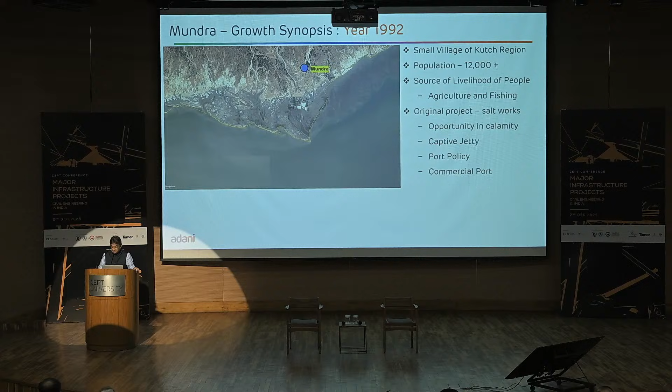That's where the story began. If you look at it now, the same asset, the same location, looks like this—something having already 26 berths from nothing. If you look at these numbers, I'll keep talking about it. What it means is that it has given the opportunity for a sleepy town to become an urbanized place, whereby, to my surprise, there is a traffic jam in a place called Jarpara, part of Mundra.

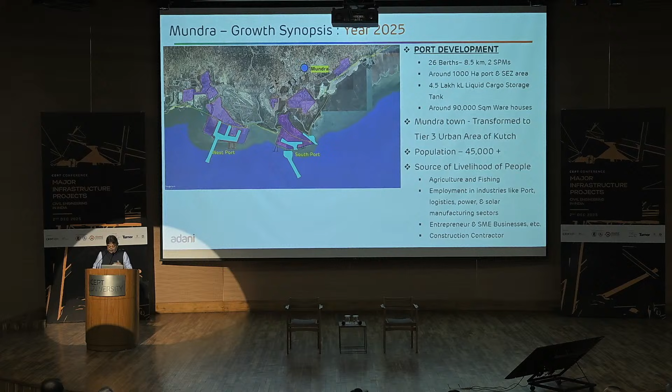And that's something very good to see, where you see the overall development, in just the journey of the last 20 years, becoming India's number 1 port, surpassing old ports like Kandla which have been there for years together. How is this going to look when we see 2050? Starting from nowhere, we are going to build 153 jetties in one single location.

What does it mean? It means that it will eventually handle, in spite of Indian growth that we are talking about, 30% cargo of all India. And it only shows the power of imagination, power of grit, power of continuity.

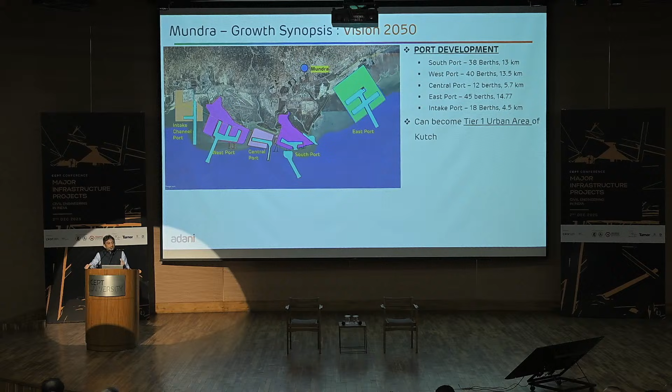Once you decide, all the natural forces as well as the infrastructure forces, be it government or private, will start actually getting accumulated. That is what has happened in Mundra. When we started, there was no rail connectivity, there was no road connectivity, there was no water, there was no power. And all of us can imagine being in Gujarat, a Kutch zone which was the most backward zone.

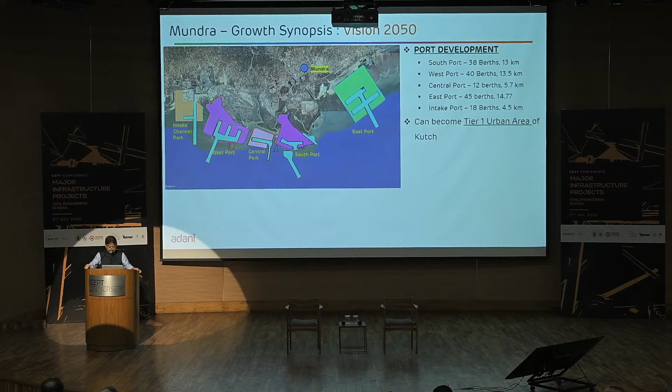The most important thing for the port sector is the connectivity, because the capacity of port is dependent on the cargo that you are receiving and the cargo that you are able to evacuate. And the evacuation for the port absolutely depends on the railway, even more than road.

So when we went there, there was no railway line. The most important thing was to build that to the national network. The nearest railway line was in Adipur, near Gandhidham, which was almost 70 kilometers away.

Now imagine, as a private sector player, to build a railway line on our own, starting from acquiring the land, thousands of survey numbers of the private and the government that we had to acquire. With the acquisition, build those bridges in between, take hundreds of clearances from government and other local authorities, deal with the local agencies, local people, local NGOs, local mafias, if I may use it. This is what one had to go through.

And then to do this construction, completing in less than 2 years, to connect to the port, because if that was not there, commercially we would have been dead.

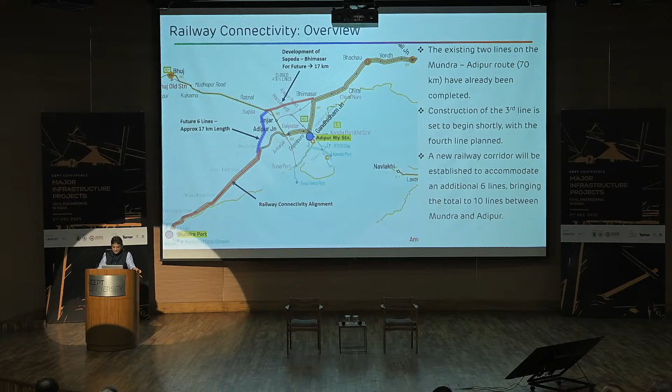Some of the important milestones, just want to share. Why am I showing this? We actually created 3 different phases. The reason of listing out is that not only are these the requirements, but the important thing is that one has to do it simultaneously.

While we start the journey of doing it, first the multipurpose jetty, because at that time you don't know, you are absolutely not sure of what cargo is going to come. You start with flexibility in design, which is a multipurpose terminal. Because today, when you see a fully developed port, you would say the most efficient would be a very specialized cargo terminal, which is for a particular cargo, or container, or liquid.

But when you begin, again, it's something that I'm wanting to convey. Flexibility brings inefficiency, but flexibility gives you hope to survive. And this is something very critical, again, in infrastructure, whereby if you try to create a very specialized facility, but not having sufficient cargo or customers, there are chances that probably it will die early.

The important thing is, when you plan and when you design to begin with, when you're not sure, build flexibility as part of planning. The multipurpose terminal that we started had capacity to do bulk, container, everything.

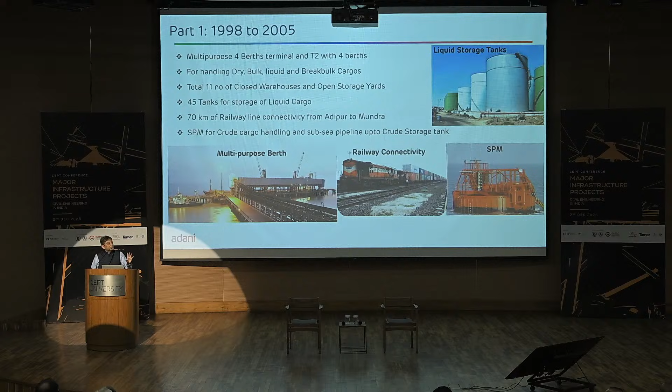So overall, the port in the first phase had the capability of handling all bulk cargoes, all types of project cargoes, and all types of container cargoes in one single location. These are a few pictures showing how, as we grew, we kept on expanding not only our multipurpose terminals, but also on the container side and the liquid side - be it on the marine side or the land side, the warehousing for liquid or bulk, or the entire port backup facility for containers.

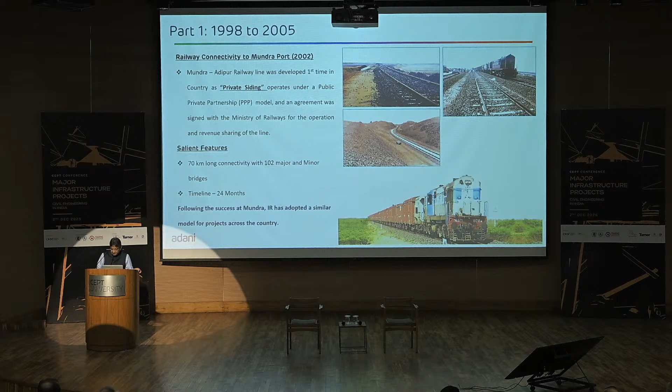Some of the learnings that I want to share - when we built the first multipurpose terminal, originally it was supposed to be hollow precast piles. In the marine environment, after doing extensive investigations of soil, a company like L&T and we decided on a particular construction methodology - concrete hollow pre-stressed piles.

When we started driving those piles, at some locations we realized the soil was very stiff and we were not able to really drive the piles. The entire engineering had to be redone. We had to change from concrete piles to steel piles in the middle of the project. L&T had to change the entire construction methodology. We lost out on 6 to 8 months. We brought in a separate, very specialized barge to drive the steel piles in the middle of the sea.

Large infrastructure projects will face a lot of difficulties. It's again about perseverance - finding the solutions, looking at the conditions at that point in time, changing your way of looking at things, rather than blaming the stakeholders at that point of time. Find the solution, go ahead with it. We lost out on 6 to 8 months, finally changed it to steel piles, and finished the project in 1998.

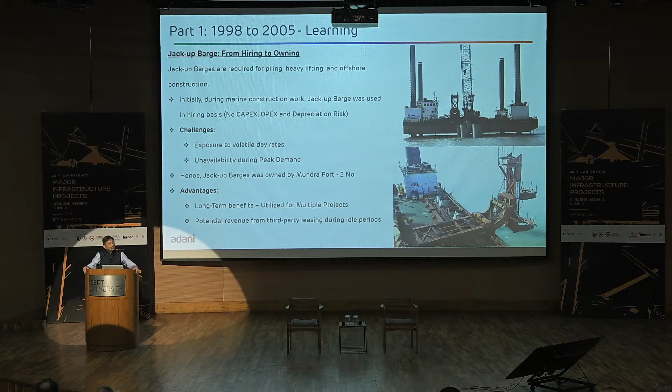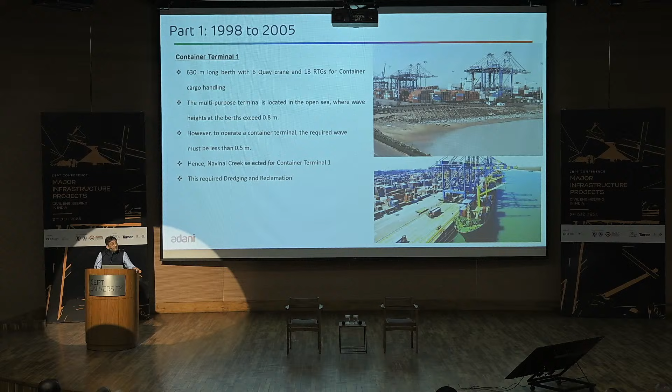As I'll quickly show you, the same thing happened in dredging as well. The journey continued right up to 2005, we kept on building. Some examples I want to show you: we did dredging in Mundra. By volume, it is 300 million cubic meters.

If you look at Palm Jumeirah, all of us know about it. That picture you see has 94 million cubic meters, and Mundra has done 300 plus million cubic meters as on date. Nobody knows about it. This is an Indian, local company with its own dredgers.

Until we started this journey, it was all foreign companies, typically European companies, who had the monopoly in dredging. They would charge 10x of what the actual cost would be. When we realized this, we said, why can't we have our own? People laughed at us, saying you're talking about being a dredging company, you're doing dredging yourself? Do you understand, it's a monopoly. We bought one cutter suction dredger.

We continued our journey. Today we have more than 20 capital dredgers. We have the highest capacity to dredge in this country, including government companies. That's why all the projects we build, we do ourselves at probably one-third the cost and at the fastest speed, because we control the entire activity. Ports cannot exist without dredging and reclamation. What is the message? The essential ingredient required for large infrastructure must be controlled by the developer and contractor themselves rather than depending on outsiders.

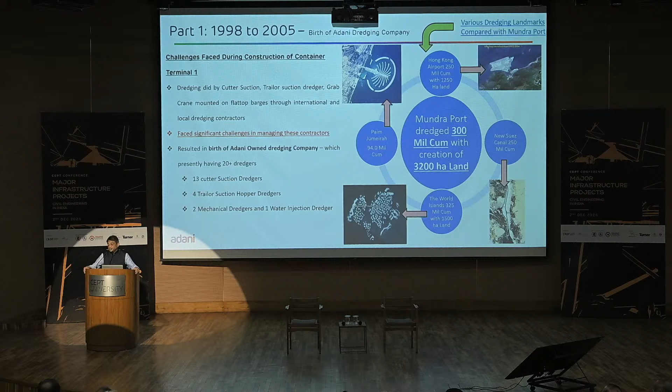This is SPM. No private sector company till date had done SPM on their own. It requires submarine pipelines. You have a floating equipment, as you see, which is 4.5 kilometers away. You have to make sure not even a drop of oil comes out of it, or you've finished the project because environmentally nobody will allow you. So executing those projects was not easy.

To save money, there is one more thing I want to share. We went to the extent of buying steel, bending them, putting concrete pipelines separately, bringing the laying barges from outside, and putting cathodic protection to make sure corrosion does not happen, all separately. While people would do it as one single EPC contract, I had at that point 25 different subcontractors being managed by ourselves, and at that point of time we saved 100 crore rupees.

The point is value for money. At that point of time, if you do not go into that mindset of saying every penny I save for my company is going to be put into creating infrastructure which is nothing but an asset for the nation—that is what has happened at every stage of life in Adani, whereby we keep engaging ourselves not only in new learning but investing in different aspects of project execution, controlling every parameter.

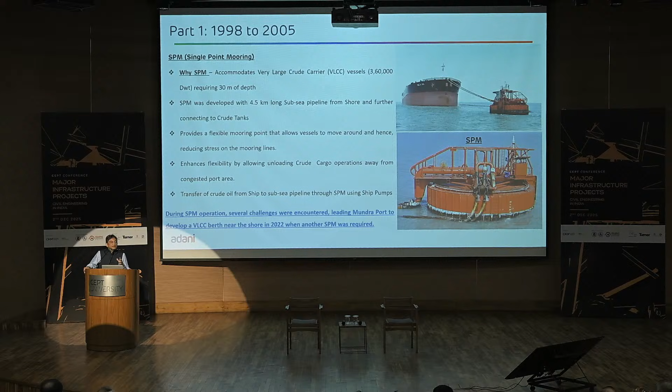When we did that SPM, we were very happy, only to realize later on why we did not build the jetty itself, whereby we would have no limitation in terms of handling. These are some learnings.

At one point in your life you feel you have done a great job, but when you see the context later on, the technology improves and your confidence improves. From SPM, now we have built VLCC handling jetties, where large vessels can directly come to the jetty. We don't need SPMs. These are not mistakes, I'd say, but kind of progressive learning that one has to keep in mind.

I'm very happy to share the kind of troubles we had or mistakes we made, because we surely want youngsters to believe in one simple thing: please do not stop.

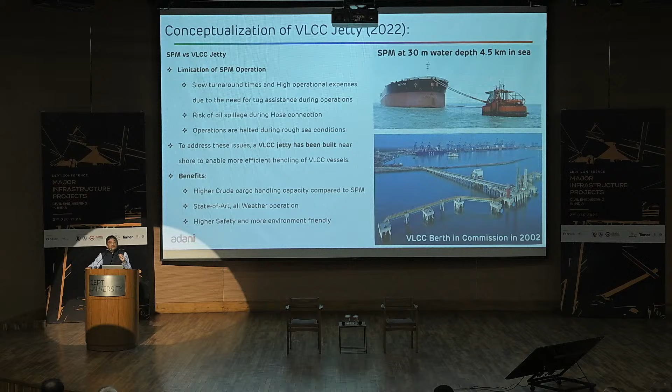Then the second phase of development, I don't want to get into the detail. Airstrip got developed, RoRo facility, all container coal terminals, second railway line. It went on and on. We never stopped, and we continued our journey.

The first airstrip that was created, obviously the financial guys were really after me, asking why do we need it. The only thing I said was, if you put the airstrip, and if Gautam Bhai starts coming faster, because otherwise he has to travel 6-7 hours and would come probably once in 3 months. But even if he starts coming once a month, the project is going to be delivered a year early. Your entire financing concern about the airstrip is gone.

So facilitating stakeholders to really come in, be it consultants or contractors, things became so easy. And that's very important for infra projects, because they are at different levels of site difficulty.

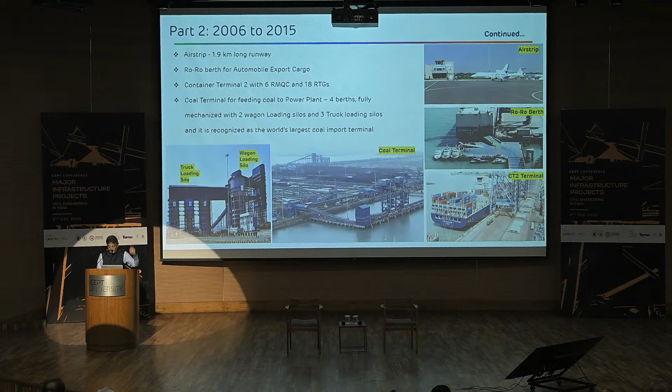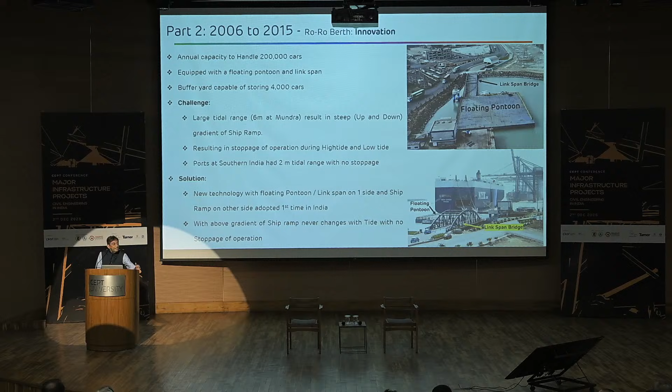This went on. These are some of the pictures you can see. Very large development happened, including the RoRo terminal. I don't know how many of you are aware, but Mundra is the largest exporter of cars. Today, Maruti and other automobile companies export their cars from Mundra.

This is one interesting example I want to share. When we started developing the Westport, we started the way we had earlier, with one multi-purpose jetty. Just to realize - and I have Vinay Singhal who's sitting here, who was part of the team - he probably thought about it: why are we doing a jetty? Why can't we create an entire basin? Rather than one jetty, two jetties, three jetties, we came up with the concept of the basin.

Because by then we had realized that we had beautiful material available in terms of quality of sand to reclaim. And if we do that, we were actually manufacturing land as port backup area, and along with that we were creating berths. These were the learnings.

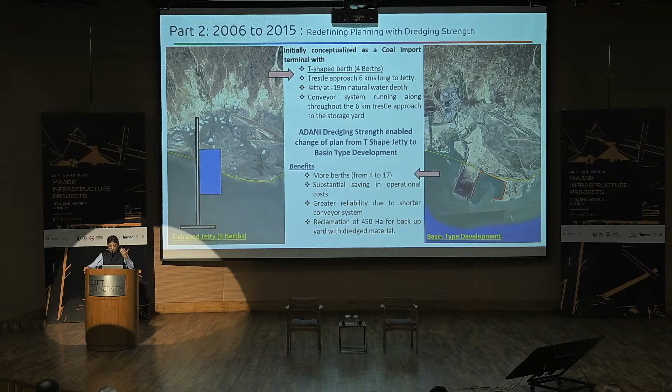Obviously, as I said, the first terminal we built at that time, we did not have the capacity and we did not have the surety of cargo. But by the time this phase started, we knew, as what Satyaki was saying, that in India, you build and it is going to be consumed. We realized at that point that if we build infrastructure, cargo will follow. That confidence was fantastic, as we saw. And then we created the entire basin through our own development.

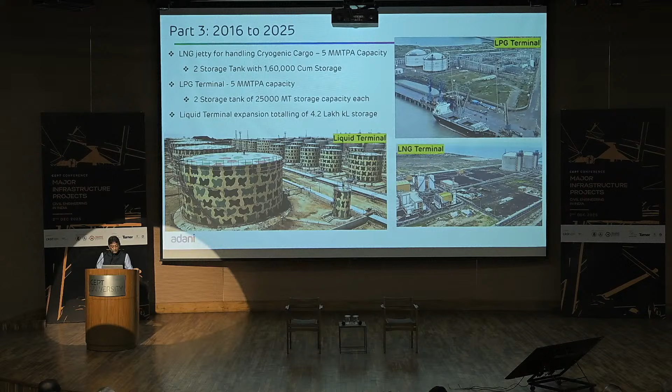Then, of course, there was no stopping. I just don't want to bore you, I just want to show you some pictures of how it really grew, including large liquid terminal, LPG, cryogenic tank terminal. There's some unbelievable stuff. And then you see these pipe conveyors connecting to the manufacturing site.

So every type of development happened in Mundra. Once the infra seed is put, it automatically becomes the catalyst for everything else. Not only infra, but now Mundra has become the hub for manufacturing.

Obviously, one has to move on. We have to transform ourselves from the traditional port way of working. Now Mundra is on its own way to becoming a fully automated terminal. Earlier, you saw hundreds of people working in the port. Now when you go to Mundra, you will see the entire container terminal operated without a single man. That's the transformation in a nutshell that I'm saying is going to happen.

And as we were mentioning, when you look at China, it's just amazing. I totally agree that there is no comparison, but let's strive for that. And that's exactly the journey Mundra is on right now.

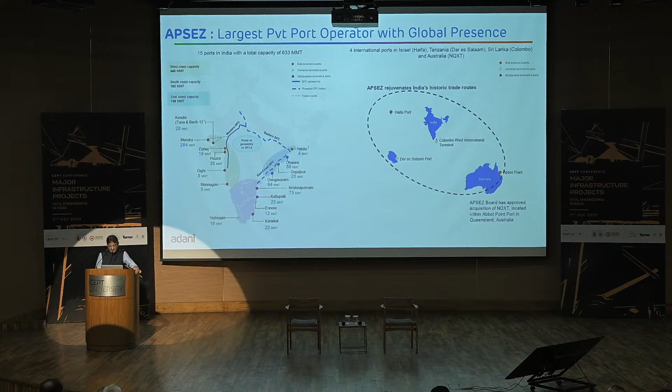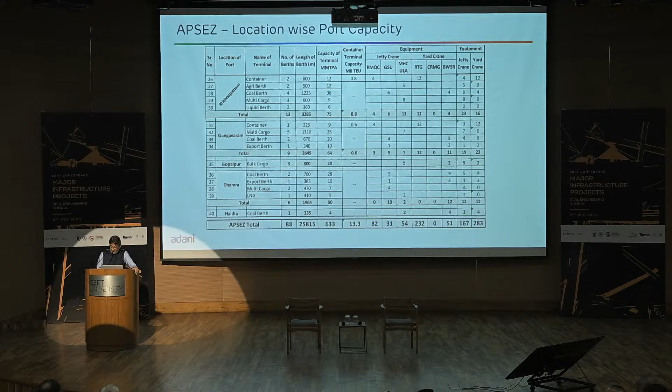If you see the overall infrastructure, these numbers are staggering. Just consider this: total capacity of the terminal is 633 million tons, which is unique. But if you compare with China, China's largest port would be handling between 800 to 1,000 million tons. And I think they have several of them, but today India hasn't even got one.

That's what we are striving for, long way to go. Quickly to sum up, while we do what we do, I would request especially the youngsters, that like every entrepreneur you see today with large success stories, it's very important to have your fundamentals very clear. Some of the commandments that we should create, and what we saw in our life, in Mundra's life, in Adani's life, starting with vision, but the important thing is hunger.

Hunger for execution. The country requires execution, implementation, and that hunger is most critical. People development, we don't focus on. However many people you have with you, working with you in your team as subordinates, focus on their training, on their development. Systems, processes, technology, the key for scaling up.

Transparency in decision making. First, make decisions. You'll make mistakes, but make decisions. With transparency, people see you as a leader who's objective, open and authentic. Meeting people halfway. We have a bigger issue in terms of egos. If this is something very simple we learn, you come halfway, I come halfway, and solutions are always there. There's nothing that can't be solved.

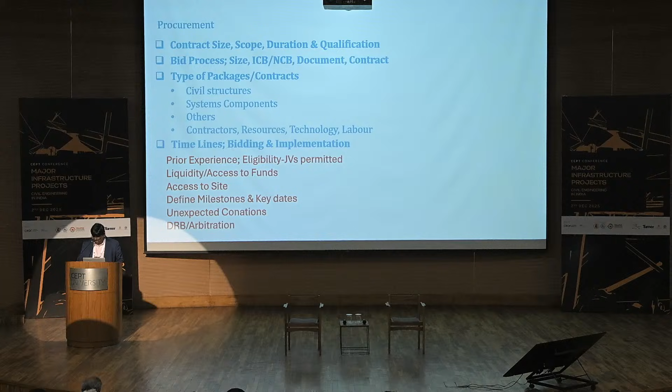Similarly, the dispute resolution board and arbitration related conditions, which got well defined under the contract in 2012-13, also took two months. We had to do a lot of iterations, make them understand, accept certain things, and they accept others. So we could arrive at a middle ground, and these conditions were accepted by the bidders also. And finally, we have the contractors.

You can see these are the so many contracts that we have awarded, almost about 41 contracts. These contracts span from 7 years to 12 years. So the contract conditions have to remain relevant throughout the contract period, irrespective of change of market situations or change of people leading the project.

There are some penalties levied based on that, but some have been refunded, because once you fail on one milestone, you are put a penalty. If you meet the successive milestone on time, then you are refunded. So this kind of provision is there. We have done that part of it, and we achieved that.

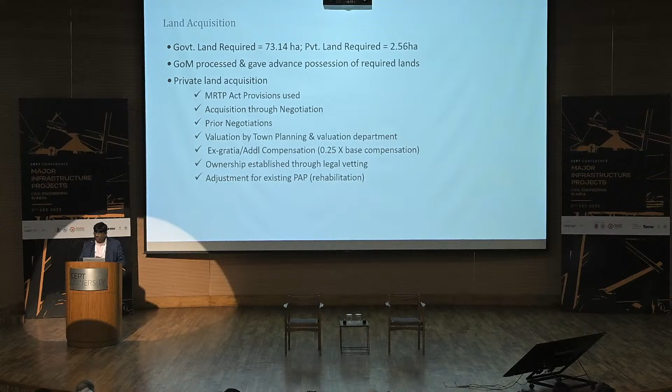As I said, 73 hectares of government land and 2.56 hectares of private land was acquired. We have used MRTP Act provisions, then followed various steps. The ex gratia compensation was quite attractive. Apart from that, Government of Maharashtra has given a 0.25 factor above if the land acquisition is accepted under negotiation process and fast tracking it. So that has made it 2.5 times the market value - very, very attractive for the landowners, and then we could acquire all the lands.

So land R&R policy was already existing, well tested, so there was not much problem about 2,125 slum PAPs. But the in situ rehabilitation has really taken a long, long time. We are still constructing these buildings - these are the 3 buildings.

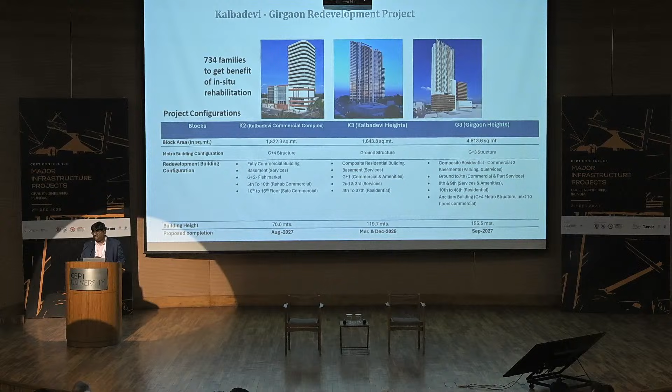One will be a 16-storied, another will be a 37-storied building, and the tallest will be G plus 48-storied building. This would be the tallest rehabilitation building built by any government entity anywhere in India. Again, all the 3 buildings are integrated with underground metro stations - this is another complexity. The reason for delay is because till the metro works are completed, we could not start most of these building works.

So these are done. Apart from that, the implementation challenges - so this is land acquisition. Implementation challenges as usual, the environmental tree cutting, then the removal and transplantation and compensatory plantation. There are survival related challenges.

So we deployed various combinations of these methods. We have done tree plantation in forest area, some microforest Miyawaki method tree plantation, and other private lands. We have gone to citizens to accept trees and give a commitment to maintain them with financial support from us. So we are able to do that.

Another challenge is that we have near about 25 court cases we fought. 5 of them gave stay orders, but the rest we could sail through. All the court cases we won, including the Aarey tree case - the Supreme Court has given a judgment in favor of us. These were fought at NGT, High Court, and Supreme Court, so we could complete. Then the Heritage Zone - the alignment is passing through 3 World Heritage precincts, declared long time back, but we complied to all heritage requirements and completed the project.

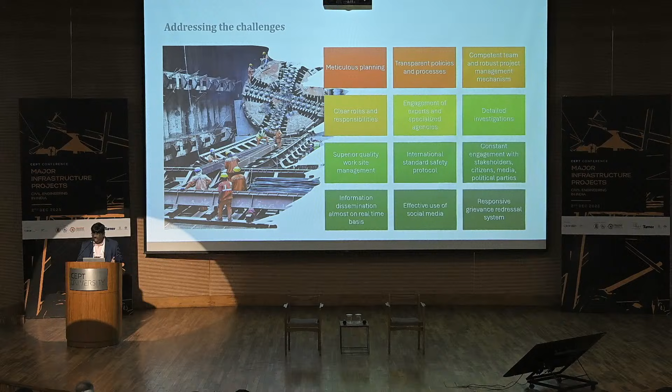That is one of the greatest things we achieved, and we are happy to mention that. We also got IGBC Platinum rating for almost all our stations, all our establishments. Of course there's a huge amount of steel, cement, concrete that went into it, but still we met these requirements and got the platinum rating for all the projects.

You can see the kind of temporary works that we had to do. Today you go there, the road is reinstated. You will never know that there was tunneling happening underneath.

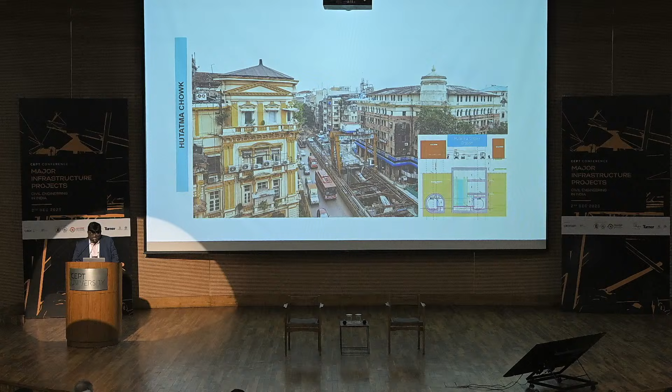Delhi had one Chawri Bazar station built using the New Austrian Tunneling Method. Mumbai Metro Line 3 has 7 such stations built over a period of 7 to 8 years.

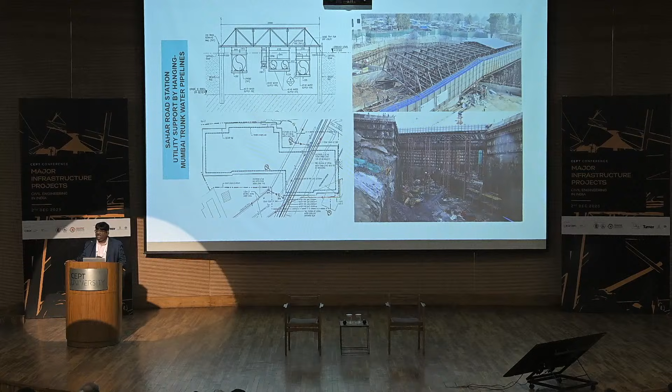These are some of the water mains we supported, as large as 3-meter water mains, which supply like a lifeline to Mumbai. These were supported close to Charu's premises, Sahar Road Station - he is witness to that. When we did that, we had to do an elaborate support system so the pipeline would not suffer any kind of damage. These are cast iron pipelines, nearly 100 years old. They were protected and the work was done underneath them.

We also had brick-lined arch drain sewer lines below Mumbai Central and below Girgaon station. Those were restored through reconstruction method. You can see the pipelines being supported. These are the pipelines below, I think, Worli station.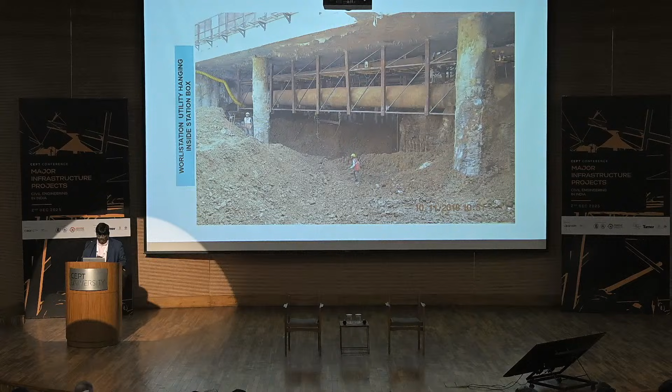Mithi River crossing. The other challenges we faced are ascertaining barrier-free access. Disabled access is one of the biggest things. We are all proud that more than 50% of our population is under the age of 30. But what will happen 20 years from now? We are all going to be 50 plus years, and all of us will also have to take public transport. So barrier-free access and disability access is one of the major things.

We tried to do our best. Of course, there is a lot of work in progress, a lot of things we still have to amend. Then, of course, multimodal integration - work in progress, testing, commissioning. Another thing I would like to mention is this - metro is not like a flyover or a bridge that you build and people just ride on that road. The operating system has to be set up.

For the first time in India, we awarded an operating contract through international competitive bidding. Of course, DMRC won the tender. It is a cost-plus hybrid tender, so the entire cost incurred will be paid, with spares and supplies provided by MMRC as per requirement. So this is another thing we did.

Then, of course, we went through COVID. We have been tested through social media and are still being tested today. Then activism is one thing we have faced.

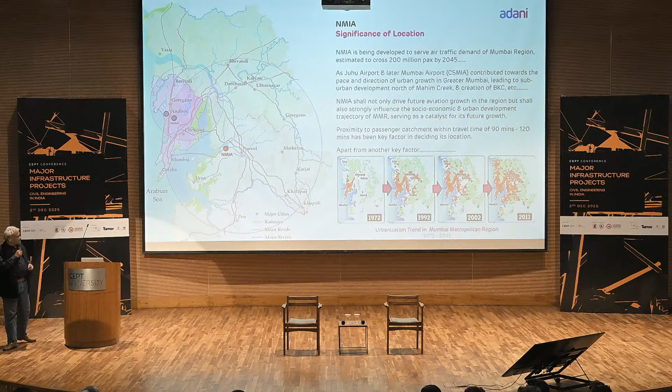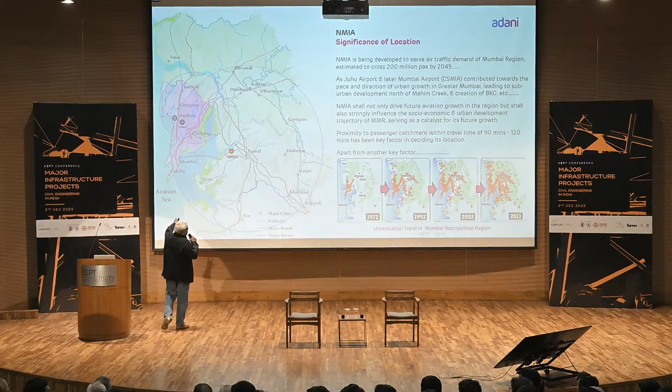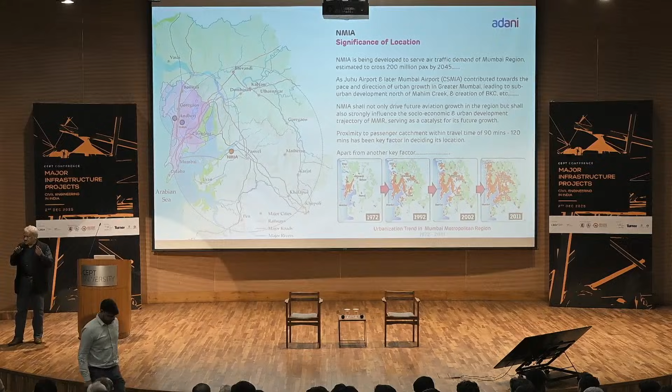This is regarding the location of this airport. I'm showing this slide because most of you are not from Mumbai and may not be familiar with where this airport is located. It's in the center of the Mumbai metropolitan region, which is roughly 6,200 square kilometers. Mumbai already has two airports: Juhu, used only for limited rotary wing operations, and Mumbai Airport in the heart of Greater Mumbai. But the rest of the metropolitan region, covering almost 6,000 additional square kilometers, is not served or in proximity to Mumbai Airport or its major passenger catchment. Based on demand for the coming years, the second airport for Mumbai has been planned.

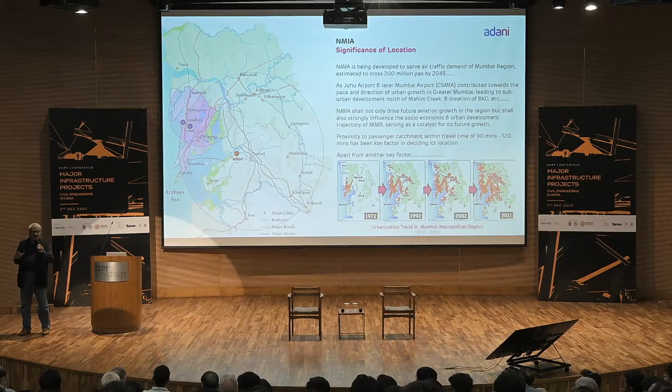This will be the second multi-airport system in this country, the first being in Goa, which has two airports, Mopa and Dabolim. This would be the second, and in Delhi we'll have the third one. The aerial distance between the two Mumbai airports is only 22 kilometers, which is actually a big challenge both for airspace management and airport planning. Its location is such that, being geographically central, travel time to an airport for domestic flights, based on global experience, should never be more than 45 to 90 minutes. For an international flight, it could be between 90 to 120 minutes.

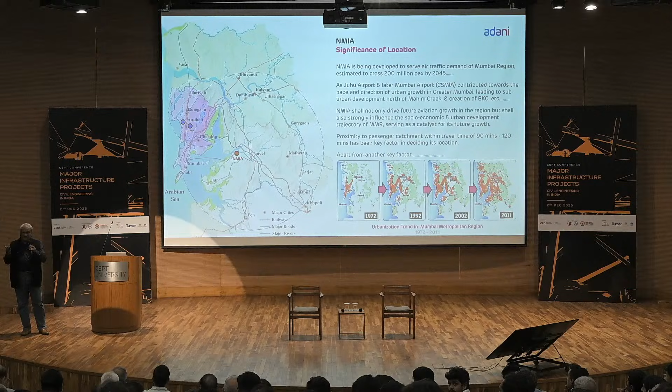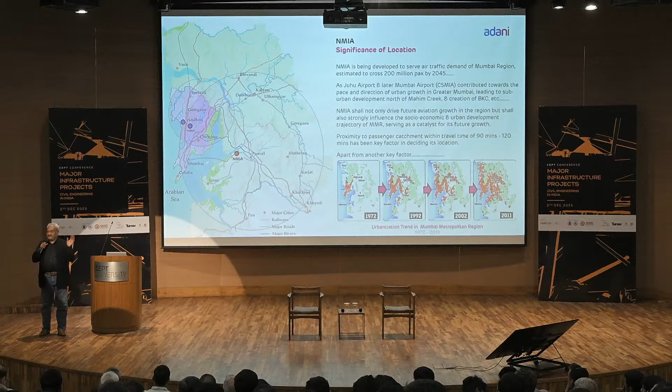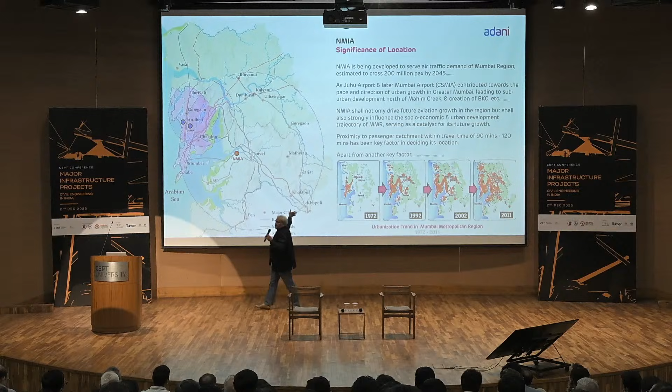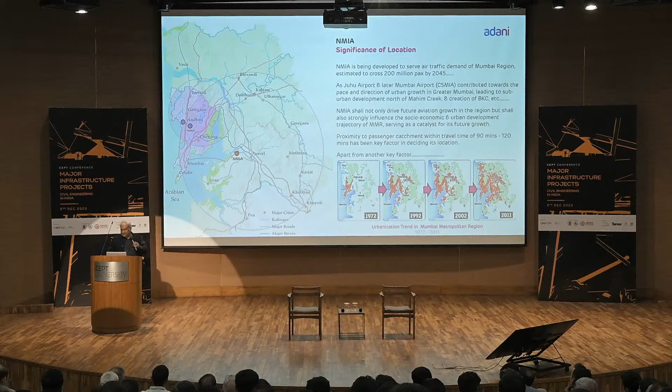Less than that is much better, but most of the time it's unachievable for reasons I'll explain. But anything more becomes tedious for passengers, who are often carrying luggage with family and friends. Therefore, this location is very vital. It was selected by AAI and CIDCO after vetting almost 14 other sites. At the macro level, the location was chosen because proximity from various catchment areas was almost equidistant by different modes of travel. The urban growth of Mumbai in past decades has been moving north and east, so this airport will be an economic driver propelling urbanization into the hinterlands of the Mumbai metropolitan region, eventually connecting it with the Pune metropolitan region, which is only about 140 kilometers from our airport. That distance is very important.

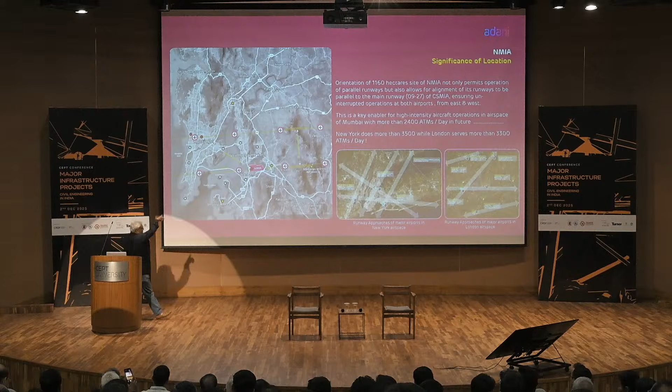The other reason for its siting is very vital. For any second airport, it's necessary that operations of the first airport are not compromised. The site was selected such that, in both shape and orientation, the approach path aircraft take to land on Mumbai airport's main runway 09/27 is retained, by having almost parallel runways at the new airport. So aircraft approaching all three runways, one at Mumbai airport and two at Navi Mumbai airport, can come in and fly out without conflicts between them. Otherwise, the overall capacity of the airport system would come down. The distance between the two airports is even lesser, only 14 kilometers, so planning the airspace has been a challenge.

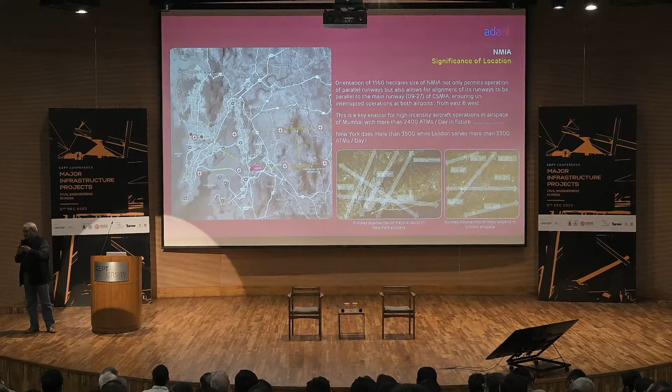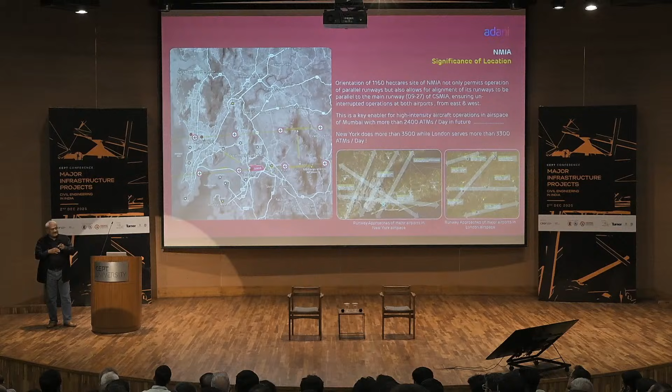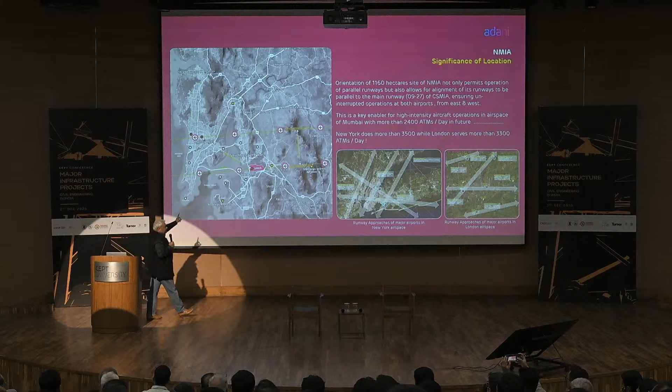It took AAI almost 4 years to arrive at the procedures aircraft have to take to land at each airport, because Navi Mumbai airport is surrounded by several hills, the biggest being Matheran Hill, due east in the approach path. When the aircraft lands, coming down at a 3-degree angle, pilots won't be able to visually see the runway, which is a precondition for them to decide to land or go for a missed approach. Therefore, for the first time in India, based on our insistence, 3 radars have been placed for this airport, 2 of them outside the airport. One sits on top of Matheran Hill, one is on an island in the Panvel Creek, and the third is inside the airport. So there are 3 eyes guiding the aircraft in, all done to enhance the capacity of this airport. CIDCO originally planned this airport for a capacity of 60 million passengers per annum. We have planned it for 90 million.

So we have enhanced the capacity by 50%, thereby avoiding the need for a third airport for Mumbai immediately, and saving a huge amount of money, both on land acquisition for the third airport as well as its construction. What this implies is we have to enhance the capacity of this airspace.

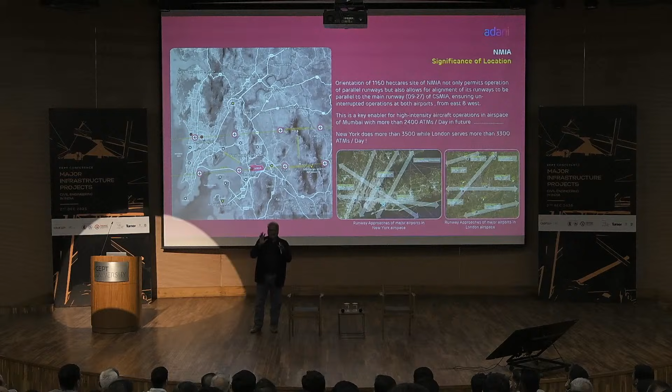Initially the AAI people were very hesitant about whether it can be done or not. Based on our own studies, we explained to them: New York, combined, has 3 major international airports apart from 7 smaller airports, managing 3,500 flights per day in that airspace. London is doing 3,300 flights in their airspace. Mumbai airport today has done a maximum of 1,100, and we will be doing 1,600. So around 2,500 flights in a day should certainly be manageable if we have parallel approaches. In London and New York they have conflicting, almost non-parallel approaches, but in our case, they are parallel.

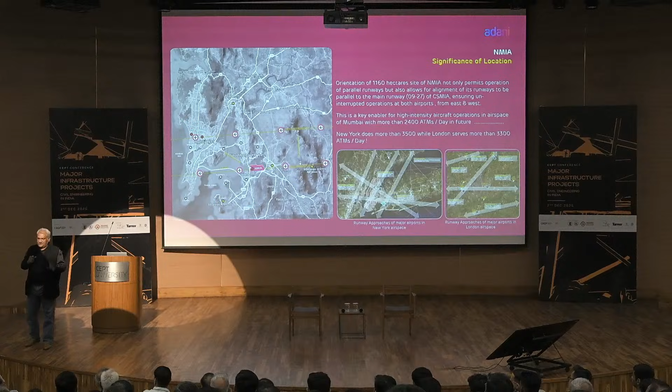So this was another important reason why this airport had to be sited there, because the next slide will show that this site was meant for anything else in life except an airport.

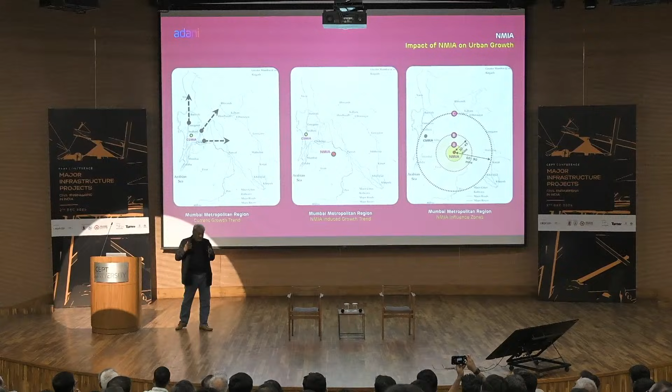The impact of an airport on a city, unlike any other infrastructure project, is very significant, and it is so silent you don't notice it until 5 or 6 years later. In case of Mumbai, most of you familiar with urban growth trends know that Mumbai city in the 60s and 70s was limited till Mahim Creek, which was still alive, and there was no BKC. That was the reason Juhu Airport was planned where it is, and the reason CSMIA was planned outside the city, so it wouldn't negatively impact urban growth.

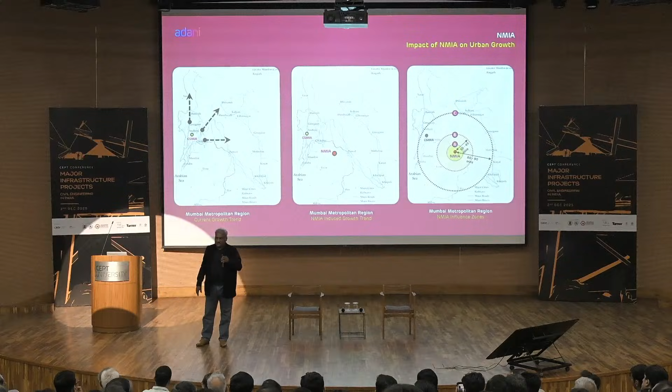But these 2 airports had such a pull of employment, visitors, and business that the city started growing northwards. It is no accident that Mr. Bachchan lives very close to Juhu Airport. Do you think it's an accident? No. Television industry, film industry, hospitality, retail - all centralized within a 30 minute travel time from this airport. Is that an accident? No, because you see the same pattern elsewhere in the world. So this direction of urban growth, you will see, will change.

As the focus shifts, it will move towards the east. One major piece of infrastructure which our colleagues from MMRDA have achieved is Atal Setu. That highway has opened up entire South Mumbai, and now the urban growth of Mumbai will be far more decentralized and far more rapid. Within the next 5 years, you'll find the maximum amount of new businesses emerging in the corridors between Mumbai and Pune.

Airport operations, development and investment impact a city radially, largely. We always count it in terms of travel time, not kilometers, because the mode is important. Anything between 30 to 60 minutes from the airport has a serious impact - land uses get transformed, the type of population changes, land values change, and so on, and then it recedes as we move towards an additional 120 minutes from the airport. These zones are very important for us as urban and city planners to look at, because we have to create infrastructure not just for the airport, but in the entire surrounding area.

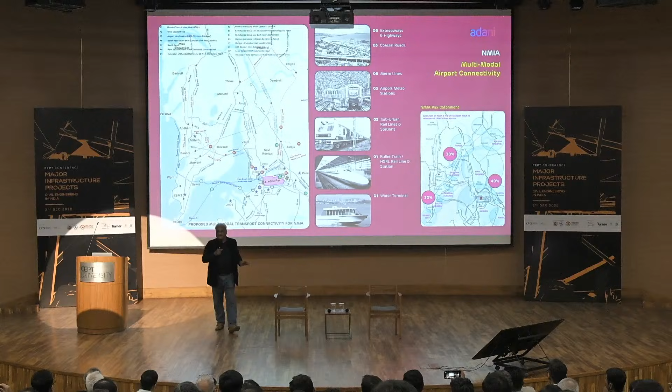We're not talking about 25 years now, because this airport will also get saturated in 15 years' time. So this is what I meant - this site was meant for anything except an airport. This dotted line in yellow is 1160 hectares of earmarked airport site.

I still recall the first time we went there. I stay pretty close to this airport site anyway. But when we went there with co-bidders from Europe, they were stunned. They were asking the CIDCO people, where is the site? And they were looking in the other direction. The CIDCO chap said, this is the site. The simple reason: the site had, right in the middle of it, a 4-kilometer long and 100-meter high hill.

Then the river, Ulwe, crossing right through the middle, getting into Panvel Creek. 10 villages, almost 14,000 trees. The villagers were waiting for us over there, because till then the R&R policy had not been finalized with the government.

Then we had 2 transmission lines - this was MSETCL, and that is Tata Power Line. Extra high voltage transmission lines - you can't even touch them, you're not supposed to legally stand under them. That's the law. This was the background on which we had to build the airport. The concession agreement said you have to build it in 41 months on this site.

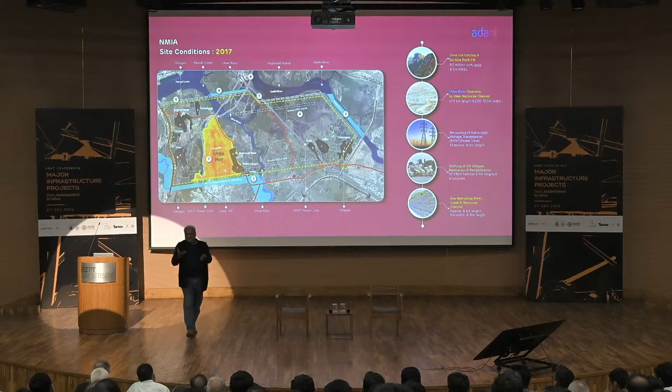This was the first village which was relocated, then these went, lastly these went. But the blasting, and we intentionally planned, as you'll see in the next slide, the major part of our infrastructure, the most important one, the terminal. Terminal is the most expensive of all airport structures, so we placed it right in the footprint of that hill, so that there is no chance of it sinking even by 1 centimeter.

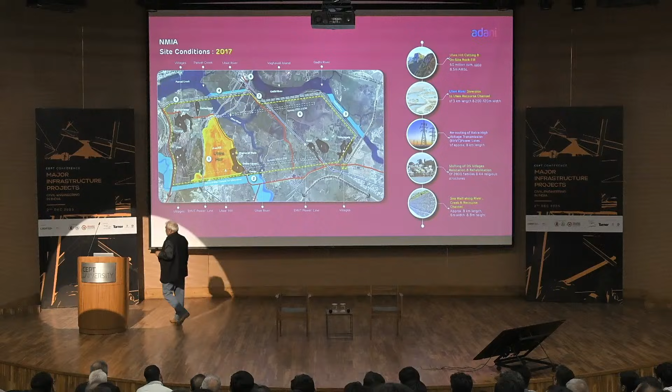That increased our work, because we had to dig a hole in the hill. Imagine the hill standing like this, you dig a rectangular hole straight down, 100 meters, like making a well, to create the foundation of that terminal at 0 level. And we did that because it was the safest way to do it. But we had to stop work on the terminal every time we did blasting, and bring the workers in, because the rocks would fly out a great distance, coming from a height of 50, 40 meters, as the hill receded gradually after blasting.

This is Navi Mumbai International Airport and its setting. We have two runways, south runway and north runway. The hill started from here and went right up to that point, and therefore this channel had to be taken through that hill. The hill had to be cut for the runway channel, so that hill is now gone, you don't see it today. So we have planned this.

This is the Atal Setu, our Mumbai connection. From there, a new coastal road will be completed in March, it's already under implementation, and it takes you straight inside the terminal. So it's a signal-free drive from South Mumbai to any of our terminals within a travel time of 30 minutes. I mentioned 60 minutes because I'm giving that additional time for people to reach the other end of the Atal Setu in Mumbai from their respective places, since that area is still busy and crowded.

We have planned 2 runways, all connected by midfield taxiways, and another 4th terminal on the eastern side, all to be built in phases. The whole intention, when we enhance the capacity of an airport, is that it essentially entails 4 different capacities to be enhanced concurrently: runway capacity, terminal capacity, apron capacity, and landside capacity.

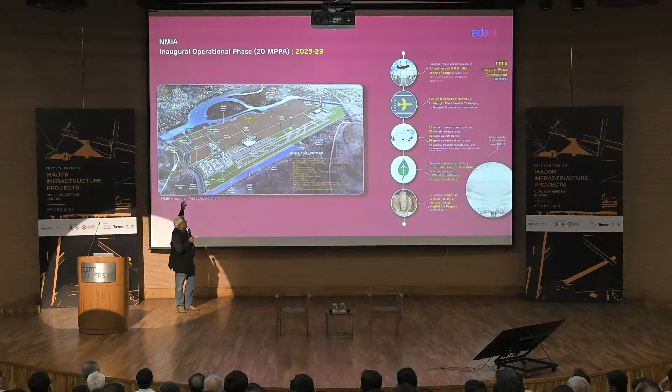This is the first phase that we are completing now and inaugurating, with 1 terminal, southern runway, main access road, all the stakeholder facilities, and an interim ATC tower. This we are going to commission by the 20th.

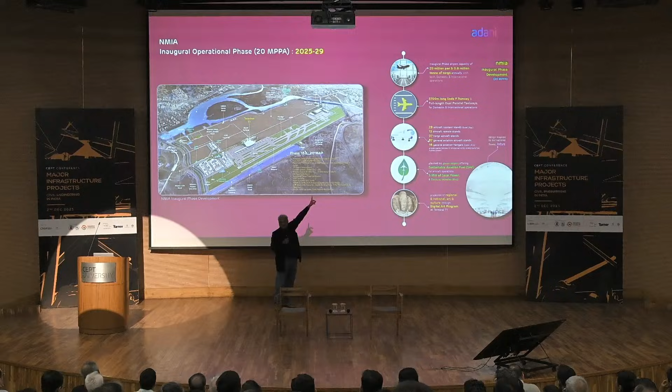And we have planned in such a way that all the passenger-related facilities are kept on the western side and non-pax on the eastern side, except for the 4th terminal in the last phase. This achieves segregation of cargo and non-pax traffic from passenger traffic for almost the next 12 to 15 years, which is a big problem in Bangalore as well as in Mumbai and other airports, where cargo trucks as well as pax are going on the same way. In the peak hour, particularly, it becomes a big problem.

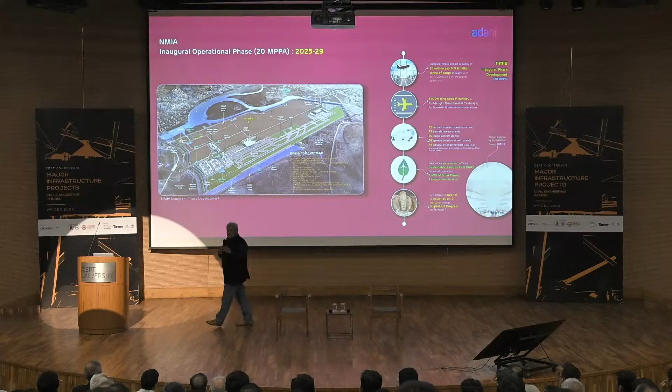Sustainability has been a very important issue for us in all the airports we have planned, and here we took it to a different level. Somebody this morning asked Raghunath regarding carbon credits for an airport. They are of three kinds. One is the credits that you get or don't get for airport operations within your premises, for the emissions that you generate or don't generate.

Second is those created by users trying to reach the airport from their house. Therefore, I insist on people using metro, bullet train, and water transport to reach us — that is the reason for 6 metro lines — so they don't use cars, or use a minimum number of cars. And third is emissions caused by the aircraft which fly out, and that is the maximum.

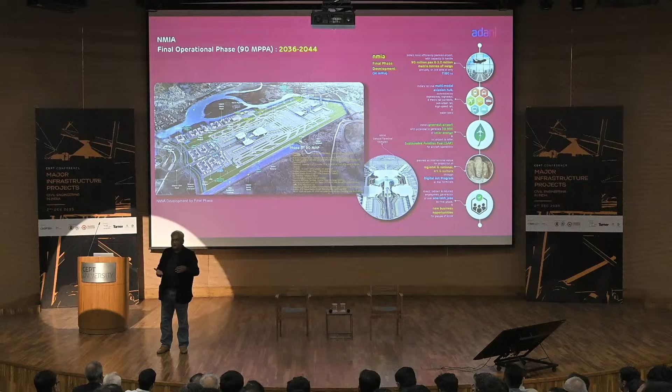Some lessons we have learned: it's very difficult to maintain, and second, very difficult to change. And third, the future belongs to the younger generation. Maybe they will have very different ideas about what they want to see in terms of art. So why fossilize everything into that terminal by fixing everything on the wall?

So we've taken a decision. Now when you come and see, perhaps you must have seen some glimpses of it on television during the PM's inauguration, but that is our step towards that, engaging with the local community, local artisans. They are the ones you will see on the digital screens.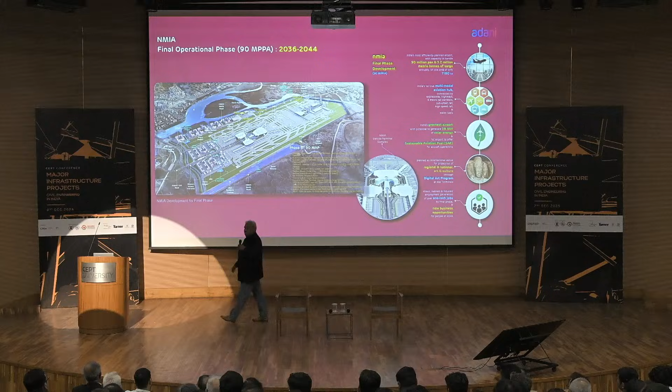And finally, the new business opportunities, which again, I'm mentioning that it has a major impact, but just how big it is, very significant.

I'll skip on these numbers because I've already briefly explained. But these are the key features which, although I've mentioned to you briefly, I again like to emphasize. We are the most efficiently planned airport, and I say this with a lot of pride. On 1160 hectares of site area, which amounts to 2,860 acres, nowhere in the world has somebody planned a 90 million capacity airport. Heathrow comes closest, it is 3,300 acres, and they are doing 80 million. Maybe they'll do 90 million, but they are 500 acres more than us. And that too, in addition to 90 million, we have 3.2 million metric tons of cargo as well.

And all this has been possible because we have infused this airport with the latest systems and technologies, which are going to be expensive in terms of our capex. But if you look at the long term, it makes the airport commercially as well as environmentally sustainable, which is a distinct feature.

Multimodal transportation hub I mentioned, the green airport I mentioned, this is the general aviation hub that we are creating. Now, this one initiative of making it a general aviation hub with 94 aircrafts will unleash a business towards its whole back chain, right from servicing the aircrafts to new additional pilots they require, the crew they require, servicing spare parts, with Mumbai and Pune being the automotive capitals or core areas in this country. I foresee a distinct opportunity for this entire business community to contribute towards this.

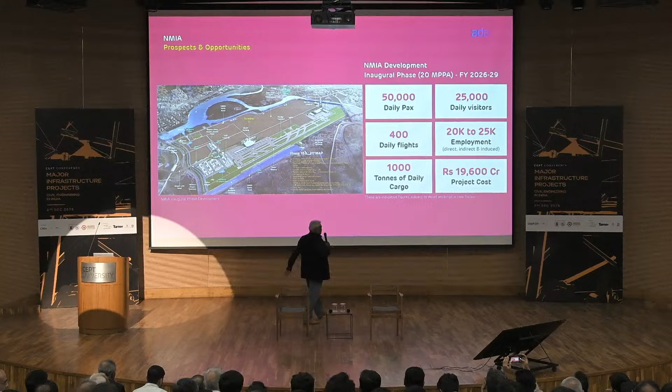We'll need not less than 100 restaurants at this airport. Direct employment is in the tune of 20 to 25,000, direct. The direct and indirect, induced employment is 3 times, 75,000. This is all in phase 1. And our project cost, I've written there, 19,600, now it is actually 20,400, in a localized area of only 10 square kilometers.

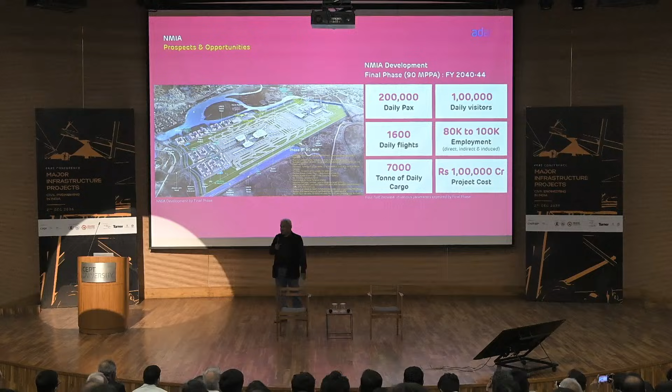By the final phase, we'll have 2 lakh passengers coming in every day, 1 lakh daily visitors, employment of nearly 1 lakh, induced employment 3 times. This actually creates a city by itself, because the economic force of this is so huge that so many people are not even available today in Maharashtra, Mumbai, so they'll all be coming from outside. And the need to prepare the next generation for receiving the benefits out of these projects and taking it forward. An investment of 1 lakh crore on an area of 10 square kilometers means what?

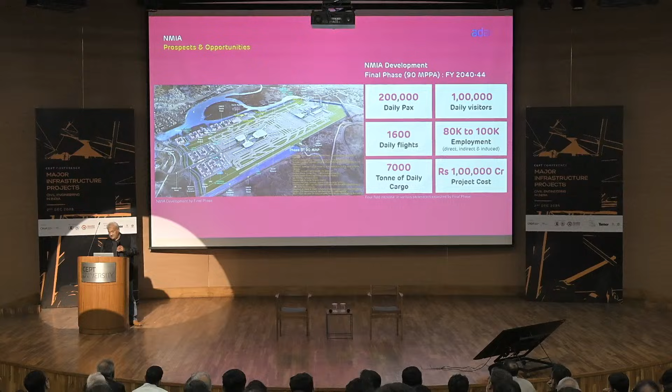It is going to burst with benefits if we are ready, if we are prepared and well prepared to absorb and receive it. This is our problem, collective one.

Airport sector today has on-table investment of 50,000 crores. We have over 300 architecture and engineering colleges, but we don't have a single certified course in airport planning, design, operation, or construction management specific to airport-related infrastructure, including our Metro.

I just said we have 6 metro lines. So I have a lot of work in Metro, airport, the water terminal. So the people who have been working with us are the only pool we can actually depend on. But how far can we take this alone?

And my question to all of you, and to myself, and I have been an academician for 13 years prior to getting into this. Why can't we do this for them?

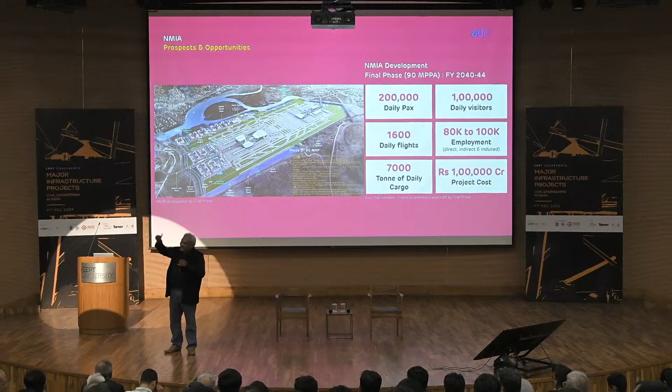One thing we did intentionally, with a lot of credit to our procurement team, Malabai leads that, and my own design team, we decided the flooring, no matter what happens, the flooring will be Indian this time.

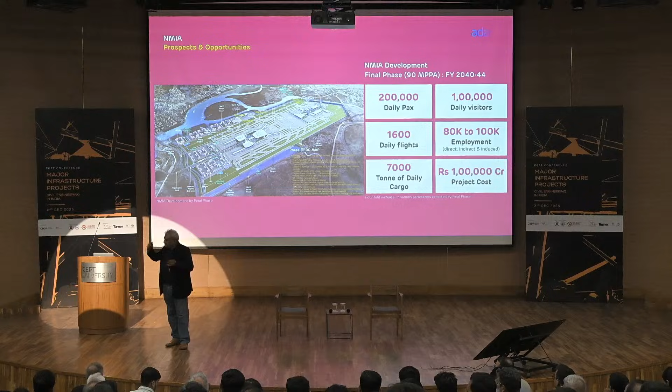T2 flooring, you perhaps don't know, the granite had come from Brazil. And worst thing, it was treated in Italy, and then brought to us, and then fixed here. This time we decided we'll have Indian granite.

So 5 of our teammates had to get stationed in Tamil Nadu. And we decided, okay fine, there will be color and texture variation, so let's design that way. It is inevitable. Let's not dream that the whole airport terminal floor has to look the same. Why should it? You can't see it in one glance anyway.

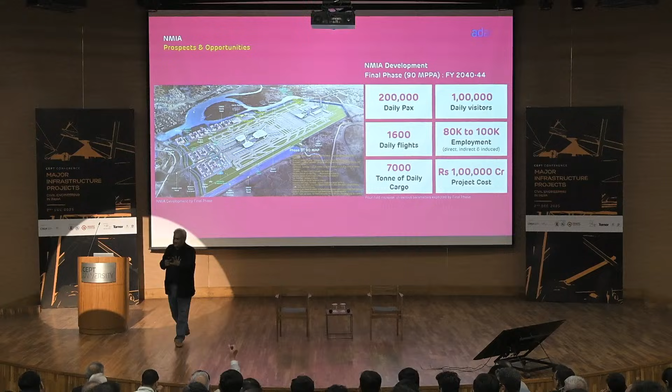So with that, we have achieved one. But we have two. With this opportunity coming our way...

Baggage handling system is something that you don't see. It is the single most expensive equipment in a passenger terminal, kept under the ground, in the basement below the check-in hall. It costs 400 crores, and necessarily, these are imported.

And it's no rocket science. Bags just move in circles and circles. That's it. We get it from China or Germany.

There was a time in India when airports did not have so much investment and building activity, and therefore manufacturers in India were not very inclined to start producing products for airports.